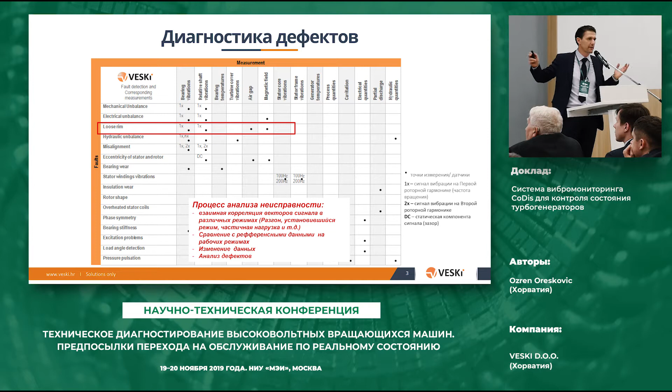So if we take a hydro generator as an example, and we want to detect, let's say, a loose rotor rim,

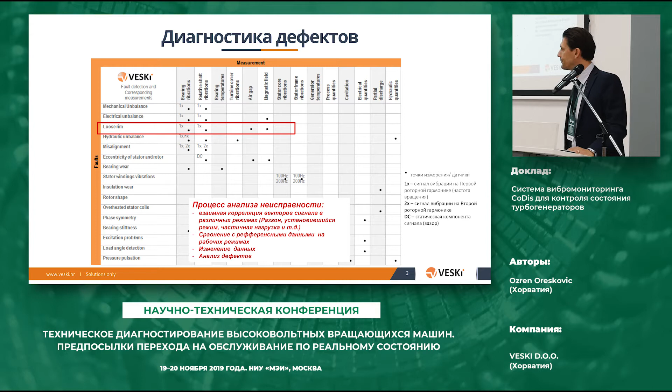So first we have to go deep into the signal and decompose it properly.

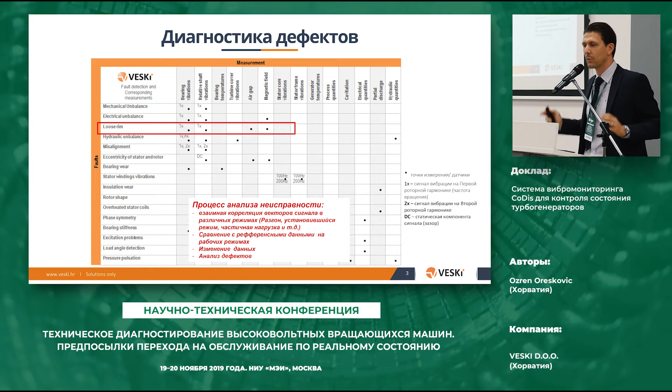So, of course, first we need to measure. So measurements are most essential.

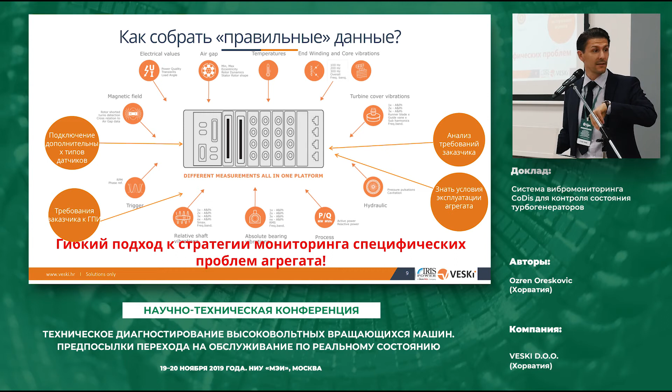Sorry, but 3 minutes only left. Only 3 minutes left? That's not possible. Please try to press. No, it's not. Okay. Sorry, guys.

So the idea is that the signal has to be decomposed properly, all right?

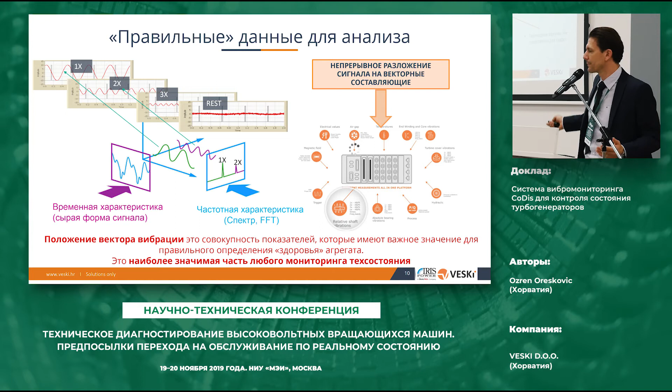To be able to address different types of fault that might occur, and this is all based on the industry standards.

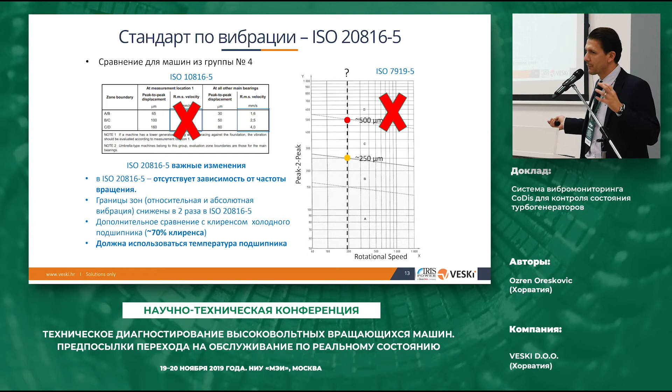The new standard is basically now a little bit better and it focuses on an actual physical phenomenon rather than just a number.

So I'm talking about the ISO standard. And this one focuses on how much bearing space basically the shaft is consuming.

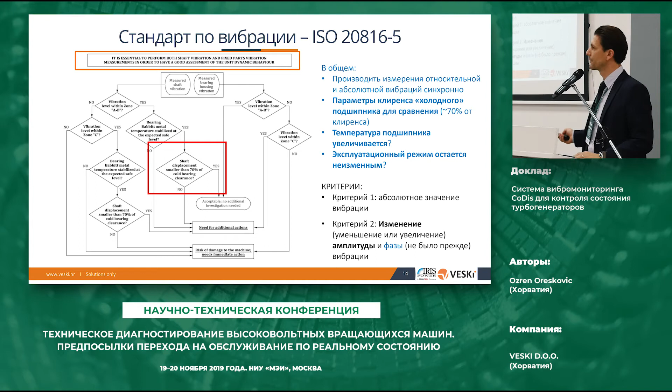I'm skipping slides because I have only 3 minutes. I thought I had 20, 30.

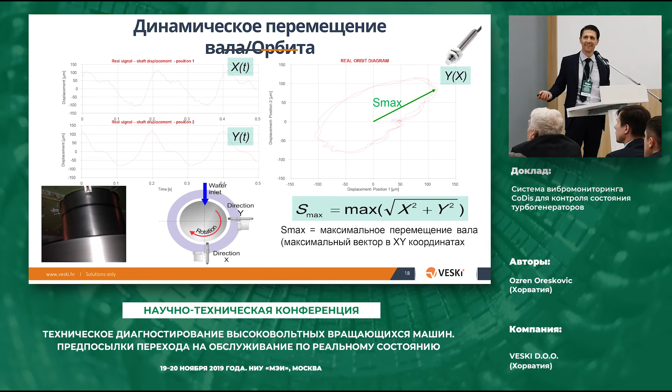So the idea is basically to correlate all the data and make the diagnostic functionality easy to interpret.

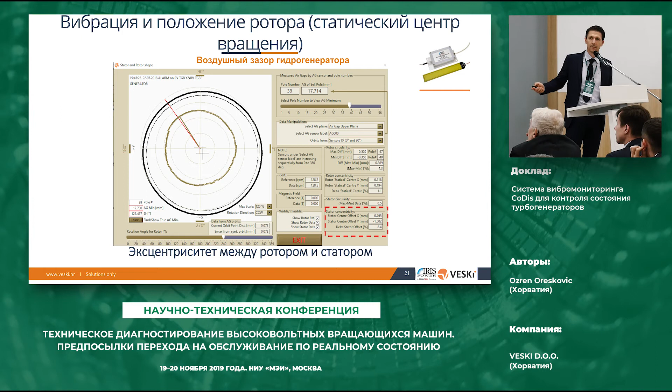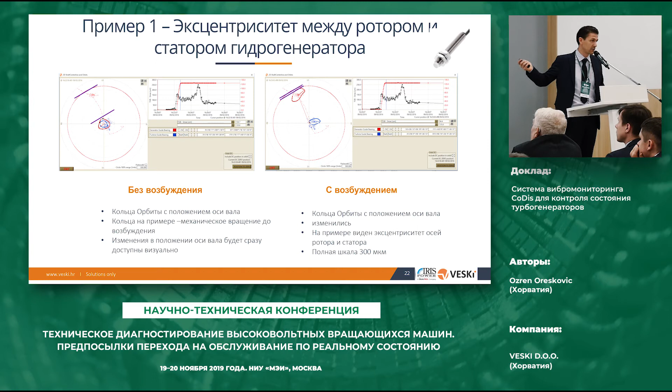So, do I have a shaft vibration changing, or do I have a bearing vibration changing?

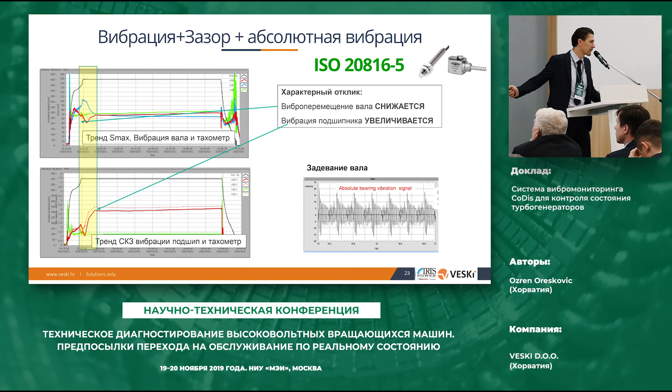And then, when you have the data, you are able to correlate basically whatever you want.

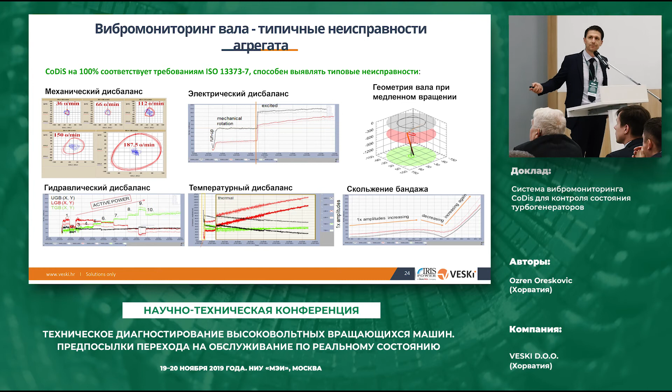Regardless of the measurement type, the fault will be there.

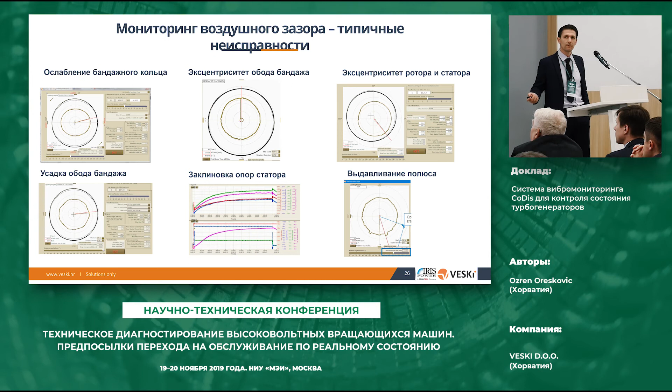So it can be either flux, or air gap, or vibrations of different parts of the machine.

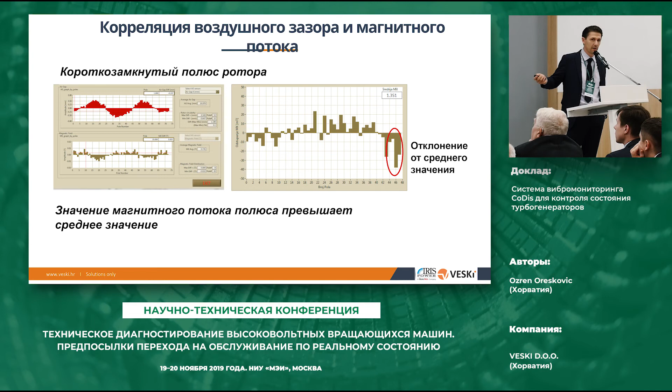It's all the same. Basically, it's all the same philosophy. It's all about the data.